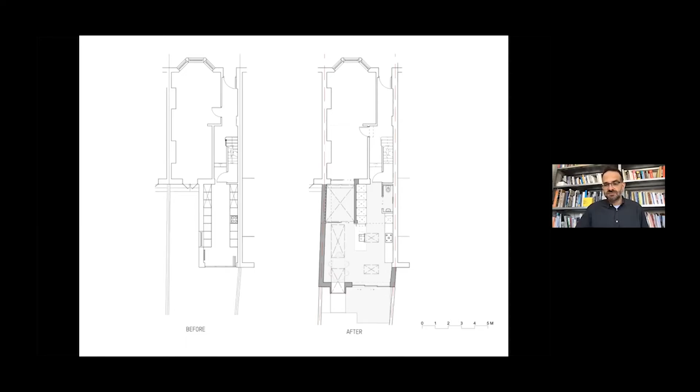And as you walk into the—

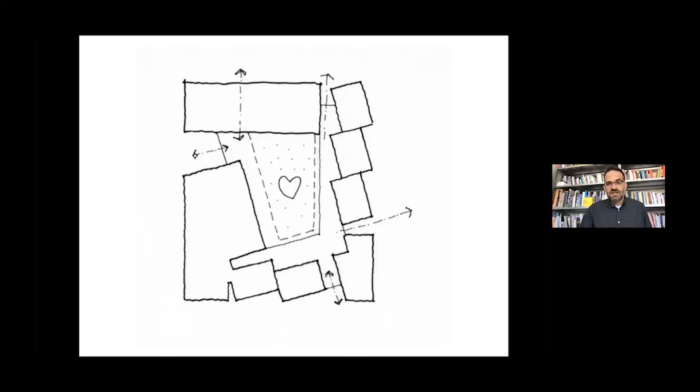The shelter itself is built around a central courtyard, which is the heart of the shelter, and also its safe haven. Environmentally, in Israel it's quite warm most of the year, so a lot of activities are outdoor, especially in spring and summer, and the evenings are quite long because of the weather. So we envisioned it, in terms of biophilic design, as a very lush and tranquil space.

The completed images are completely different, and I'll touch on that later, but as I pointed earlier, there were a lot of challenges with this project. One crucial one was the budget, which was extremely low. The building itself is about 800 square meters, and it was an equivalent of about $1.5 million for the whole project. That budget includes everything - everyone's fees, all the furniture, everything you can think of.

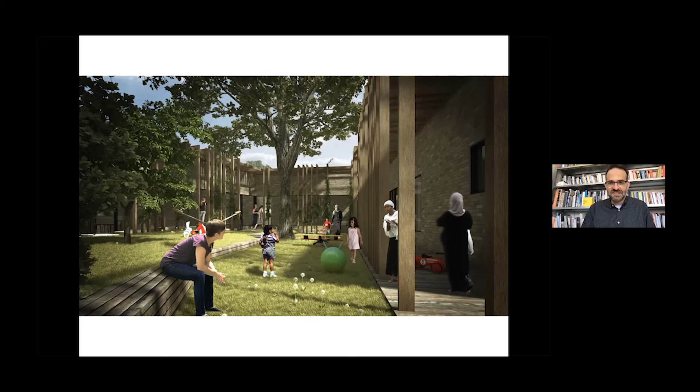The other concept behind this was really the notion of home. So we wanted each room to actually be a house that a family gets. Each of these houses contains two rooms, so two families within a house. And the shelter is seen as a small village, or in the connotations of Israel, like a small kibbutz.

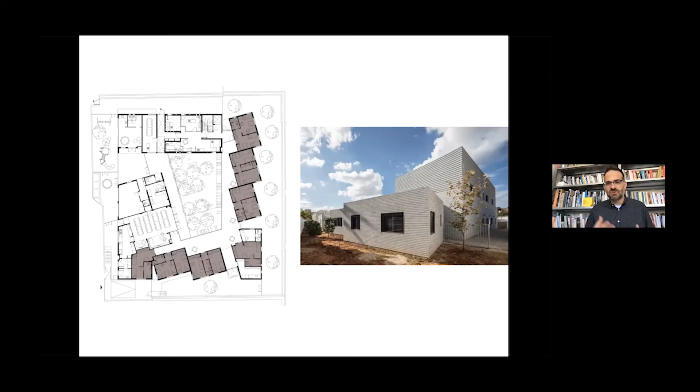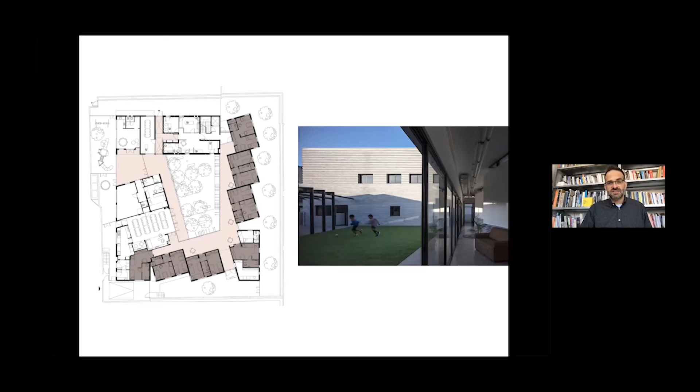These houses are connected by a street, which in this case is an internal-external corridor that links all the houses together and also surrounds this internal courtyard. This is a shelter for women and their children. In the morning, the kids either go out to school, which is outside the shelter but nearby, or within the shelter there's a nursery, other classrooms, all the admin facilities of the charity, and a dining hall where they work in the kitchen. That links everything together.

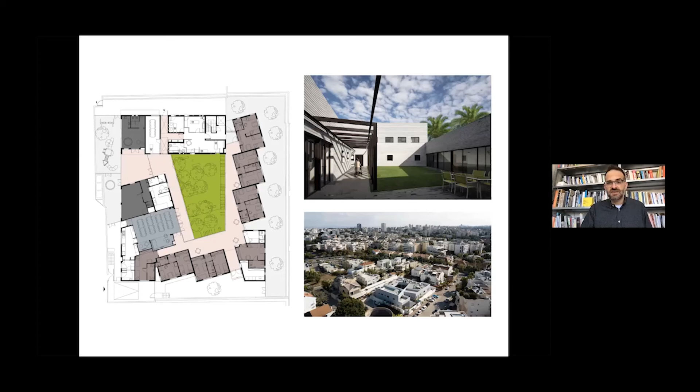These are just some photos of the central courtyard. Shortly before it completed, since we were working remotely on it, the client sent me a photo of the courtyard, hinting towards this really green central thing. It looked too green to be true, and in fact it's astroturf, not real grass.

I said, no, you can't do that. And they said, well, listen Amos, this building first of all needs to be safe, which it is. It needs to be very practical, and they had to cut a lot of the budget - a lot of the things that went were all the plants and the irrigation. So if they can save money by not needing to irrigate the grass, that's a huge saving for them, because they rely on private donations.

Of course, yeah, and also, I mean, a lot - I was going to say, if it's astroturf, it's still biophilic design because it's a simulation of nature. So yeah, it's a visual representation. And you've got that outside, true, inside.

But interestingly, with this project, it's an evolving building. As architects, we design things and they look great when finished, but we have to remember we design it for someone, and once we pass it over, it stops becoming our thing or our creation - it's at the mercy of the end user. In this case, every now and then they get a donation of plants, so they've started planting within this courtyard. Maybe it's not plants that go into the ground, but they sit in big pots.

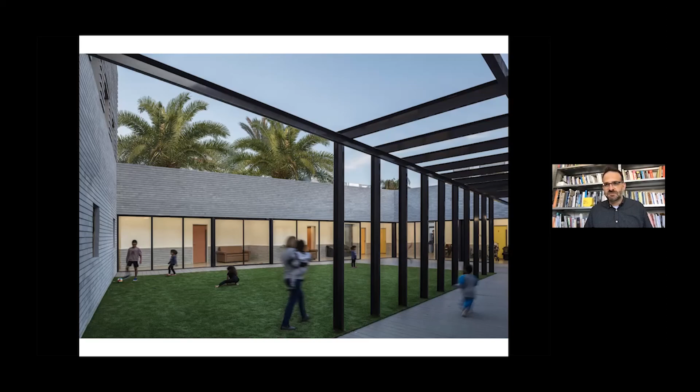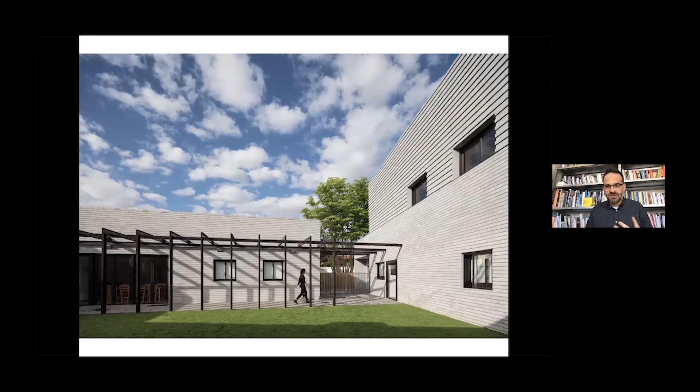And it benefits the women and the children, that's the main thing. You can see here the majority of the shelter is on one level, so it's fully accessible for disabled women and children, apart from the two-story block on the right, which is mostly admin accommodation for the charity, where they have their main offices, helplines, lawyers and social workers.

I jumped ahead. So yeah, it was a very rewarding project on many levels. And the photograph you're showing right now, there's kids playing in the middle of it on this astroturf, this green simulation, and you can see the plants, these huge palm trees that are outside the building but visible inside, because the whole focus is being outside, in the natural world, embraced by this haven, by this home.

Exactly. It's a lovely space, and I can hear that you're really passionate about it, and it's a really personal project for you. So Amos, thanks very much for sharing that.

Sadly my mother passed away during construction, so it is now named after both of them. So that's a nice thing.

Well, Amos, thanks so much for sharing this with us and the other two projects. And as a final question, which our regular listeners will know, if you could brush the world with a magic brush of biophilia in architecture, what would that look like for you?

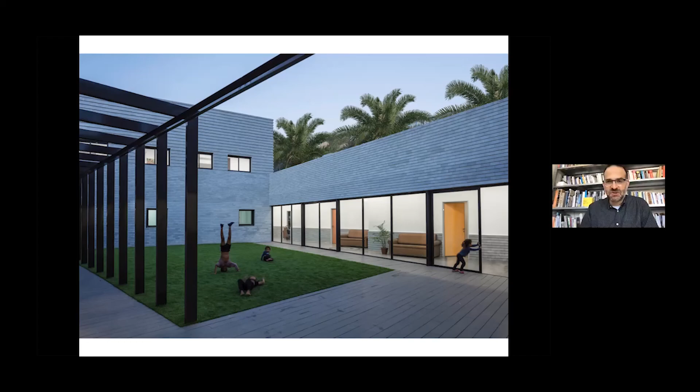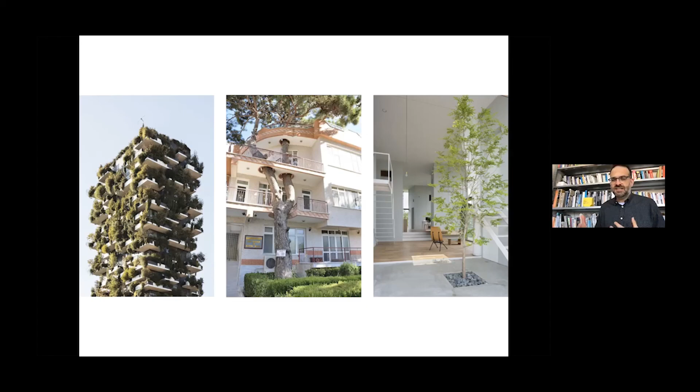And then the right one is really pushing it even further, where you start planting plants within your house, so it's not in a pot. This is the entrance living room of a house. The design itself is very, very minimal, but bringing plants in and integrating them with the interior space completely changes the feel of it. So yeah, this is my choice.